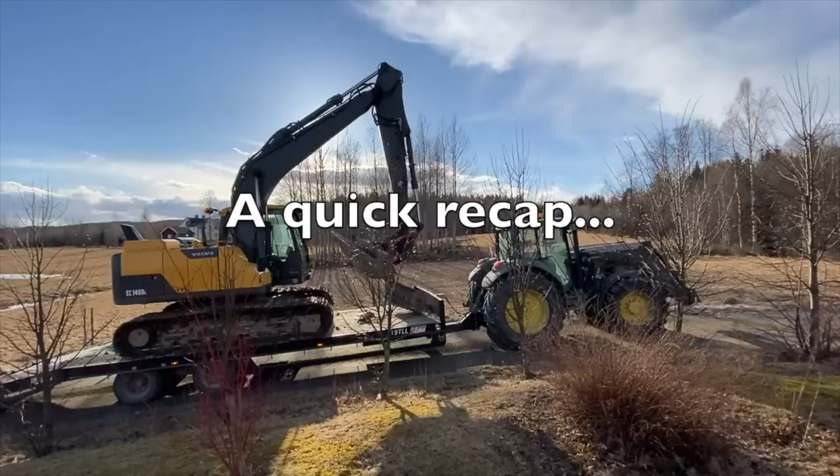All right, well, this front lawn is about to change. The dig went extremely well.

Well, it's come to that time. We're getting digging, we're starting tomorrow. It's super exciting. All right, well, this front lawn is about to change. We're starting digging tomorrow - swimming ponds, Attefallshus. It's going to be very different.

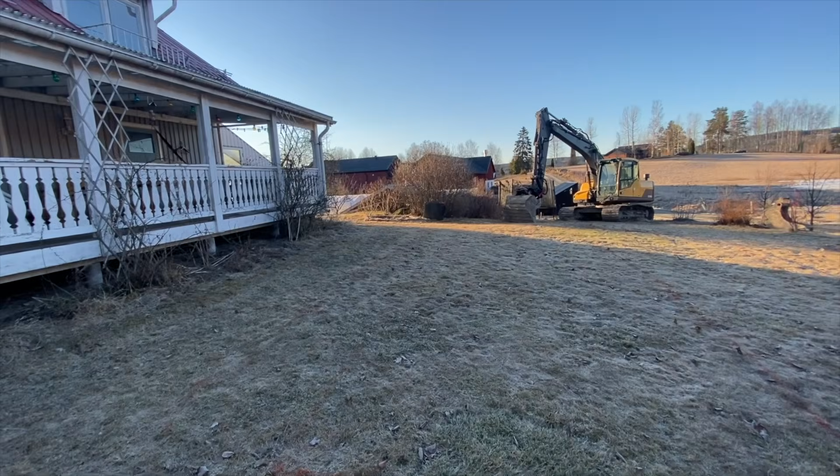So regular viewers of the channel will know I've been planning a natural swimming pool build for a couple of years now, and now's the time to get on with it. So the build, in a nutshell, is going to be dig a very deep hole, 3 by 10, with a pond of equal size around it. We're going to have to berm up this side to get the ground a bit level - take a bit from here, add a bit here.

First thing, take the topsoil off, put it aside for repairing the job. Dig - hopefully we haven't got any massive rocks we can't deal with. Probably up to about 5 tons we can move, but it seems the house is built on sand with lots of smaller stones. Certainly from when we dug the lean-to greenhouse, that's what we found.

And then we've got to have some flat pad where the excavator is standing. We're going to build an outhouse there for extra accommodation for guests coming to visit - come and visit me in Sweden, you lovely people. And we've got to dig a pipe to the lean-to greenhouse that's going to house sewage, water and electricity. And we've got to have another pipe that goes all the way to the septic chamber for this new house. But we're not going to build a house just yet.

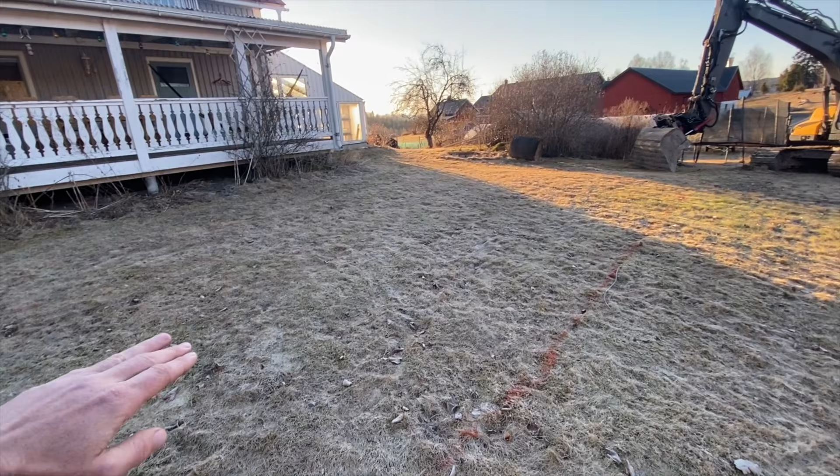We're just going to dig and make a total mess of the lawn. And then I'll probably start building up the concrete block wall in here so the sides don't subside. It's quite sandy, so we might have to dig at an angle so it doesn't collapse in on itself. And then we've got pond liner, then we've got to put in some subsoil on the edges of the pond for plants to grow in.

Cover that all up with gravel. Install some pumpy things that make the airflow nice to keep it oxygenated. Plant lots of nice stuff around and do some landscaping, and come May we'll be building a little house here. It's going to be pretty awesome. So let's get straight to it.

All right, digger's here, I'm not even ready. Got my trusty laser level, got my spray paint, got my measuring tape. Let's go.

Okay, so we begin - that's kind of what we're doing. We want to end up with some nice decking around here to the Attefallshus, that's like a little mini house, and a deep swimming pool, 3 by 10, maybe 2.5 deep if we can get down that deep, with a pond of equal size around.

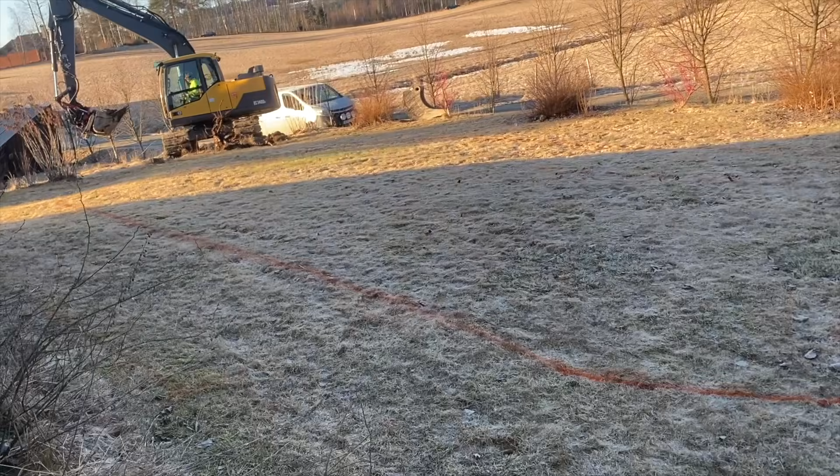We're gonna have to berm up this side. First though, just taking the topsoil away, putting that to the side. We'll see how it goes.

Time to get the coffee on. Just a normal day on the farm.

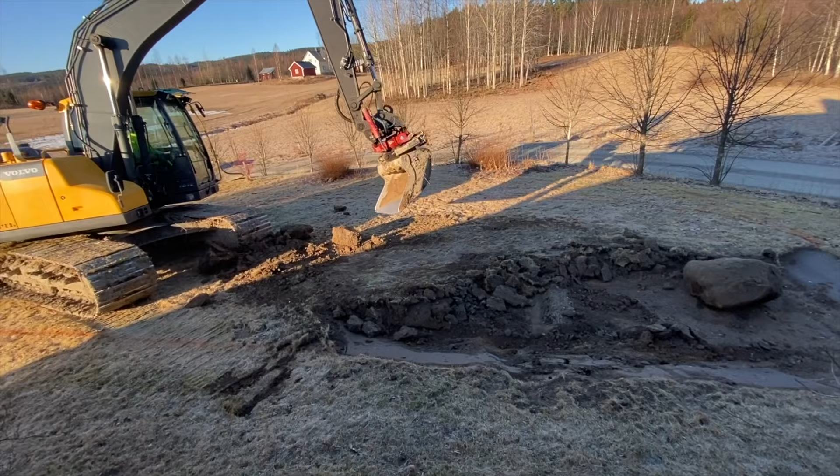Only got one way in with the digger, so we've got to backtrack. Basically we have to dig from this end and leave it complete as we go, because the digger can't come back in. Fuel price has gone up - Eric was telling me it's 600 euros to fill the digger now. That's a couple of days work on the digger typically, but fuel price has gone up a lot, as you all know.

So we'll see - this is the same digger driver that we had digging our big pond. He's very skilled, and with that angle bucket can really sculpt the ground here. It's a bit frozen on the top, so we're just digging out frozen topsoil and stockpiling it for now.

So this side is going to be underneath the decking, so the decking's going to come out straight into the deep bit of the pond. So it's going to be quite a sharp angle on this side - that'll be hidden away under the deck a bit. Get some plants in there, like lilies etc, and then we'll have more plants on the far side.

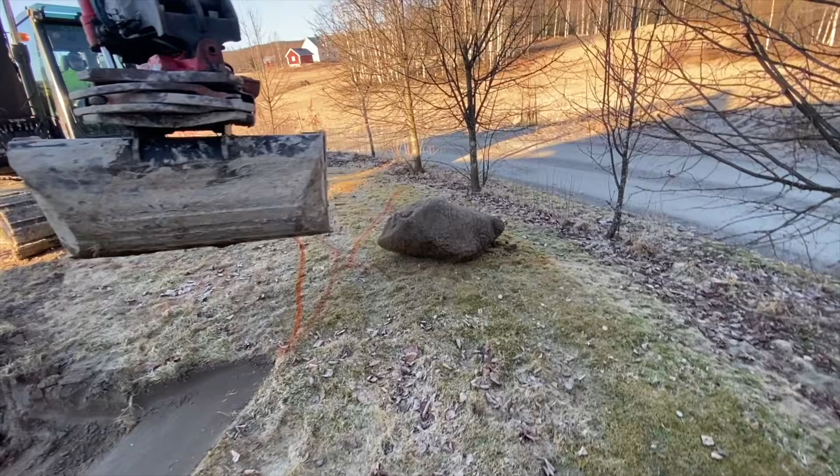All right, that's the sitting rock - sit and look at the water. Always hard to see with your eyes, but we have a pretty level surface along this edge, which is perfect. But that means basically the rest of the surface is going to be built up.

So it's starting to build up now. It's going to build up probably quite high on this side. We're going to measure that.

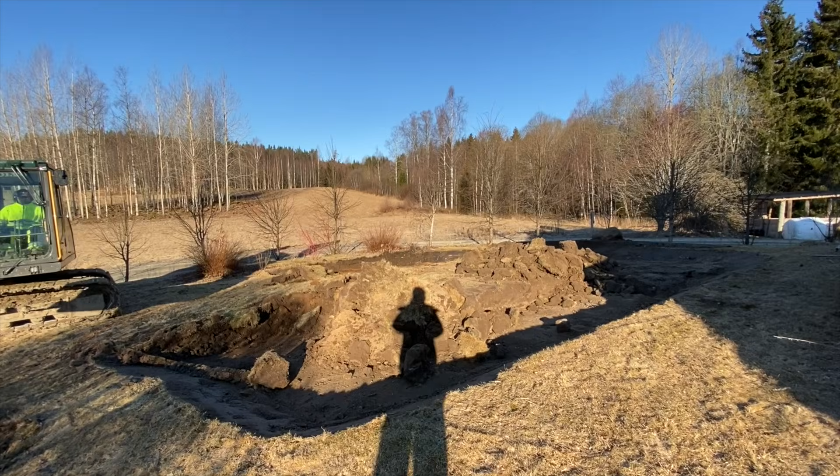It's always fun to watch the digger driver, and I spend the entire day just observing, thinking through how he's thinking through the job. I learn a lot from that process. I've always sat and watched all day when big machines are working, because there's a lot of thought and skill goes into a job like this, and thinking through workflows, which is something I love to do too, so it's really fun for me.

We started building up the far end now, but it's going to really raise up the garden on the far side. Those bushes there, I want to keep the trees, but those bushes might have to go to level it in and try and make it look a little bit natural by the end of it.

Getting to the sand now. It's frozen in the topsoil that we're lifting aside. I'm curious if we're going to be able to go straight down here, because you never know what you might find. But good progress, I've only been at it half an hour.

My plan is to possibly just take out these two panels, but maybe take out all these panels and build an integrated deck that steps down to a flat deck at the edge of the pond. I've got these roses in all the corners and two on the front here, so I'm just pruning them now, and I might have them popping out of holes in the deck steps. Could be quite beautiful, I like flowers.

Who doesn't like flowers? So Eric's just moving soil downhill. We'll probably come with a tractor and trailer later, but some of this topsoil is going back onto repair. We'll have a lot of subsoil to be removed that will get dumped up at the top of the farm. So far so good.

So I've been at it an hour now, but this subsoil looks pretty nice to work with. Let's hope it goes down like that for another 2.5 meters.

We hit an old drainage pipe that comes from this guttering here to drain away from the roof, but what I might do is intercept this and have it filling the pond anyway, so no big deal. What I don't want is water draining into this on the outside of the pond liner, so that it balloons the liner up through the wall, if you see what I mean.

It's very sandy, it looks very well drained, that's why the house is built up here. So I think what I'll do is put the rainwater straight into the pond and have an overflow to the ditch at the other end.

So we're digging this bigger hole so that I can put insulation on the outside of the brick wall. So we're digging bigger than we need, so we end up with a 10 by 3.

Love this tilt bucket that all the excavators have here in Sweden. It really turns this big machine into a sculpting machine. Saves a lot of time and a lot of maneuvering, therefore a lot of diesel. And this machine is moving a cubic meter every 30-40 seconds.

More rocks. It's going to be a nice sit spot, but it's going down real nice here. That's the second bigger rock we found.

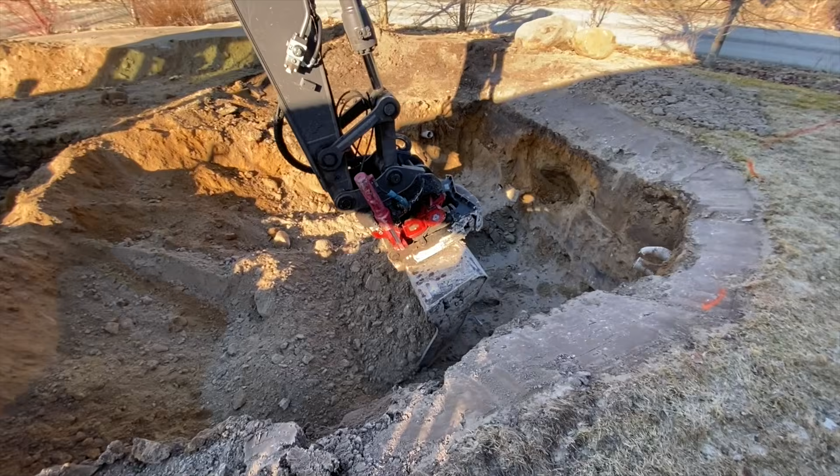I love this kind of process. It's just super creatively fulfilling to design projects like this and then carry them out. It's always an exciting day when the digger comes and it really starts actually happening.

Grace has got a play date today, so we've got a good long day of digging. I expect we'll get quite far with this.

So that's approaching 1.8 meters now, 2 meters. We want to see if we can go down to 2.5. All right, just marking levels.

You can see it's quite a lot higher up on this side. This is the lowest corner. Okay, on the fly meeting.

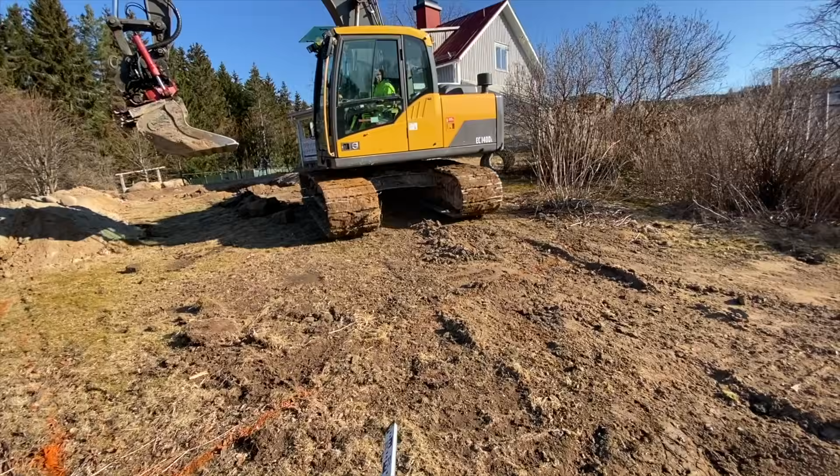So here is the pad for the Attefallshus, but it's going to be down below that wall where you can see my spray marks. So we decided we're going to take all the topsoil this way, stick it down in this growing pile and build this whole land up to put the Attefallshus on, which is going to just be way nicer. It's going to be looking over the pond at the same level as the house, and it'll be quite a big disturbance.

We're going to dig up these bushes and batter this wall with all the soil that we're digging out and just make this quite a steep slope down to the trees. It's going to look quite different in here. That's the way it is. That's what we wanted.

I always hated these bushes, so I'm not even going to bother keeping them. Just get rid of them. A lump of frozen bushes.

Let's measure this, see how deep it is, and then get the drone up in the air. I think it's a good call to lift up where the Attefallshus is too. That's where the digger is now.

It's going to look a bit weird from the outside because it'll be like a steep bank, but from the inside it's going to be a glorious spot to have that house at the same level. That also gives us more purchase on the sewage that needs a bit more height to get a good drop to the sewage.

But it's going to make this enclosed space with these lime trees forming like a visual barrier when their leaves are out. And it's going to be a little sun pocket in the evening. It's going to be beautiful.

Visions coming to life. Nothing holding you back. Just got to go for it with these things. Life is too short not to do awesome stuff.

Okay, topsoil's gone from the Attefallshus pad, so we can build that back up. And now we can use the subsoil. Still got to go down 20-30 centimeters in the deepest bit, so we'll have plenty of soil to build all that up with.

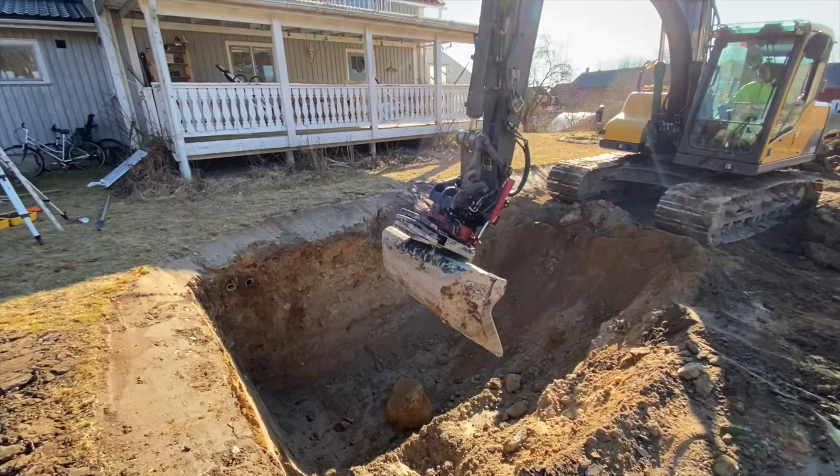Another rock for the collection.

Alright, a couple of hours in and we've reached depth. It's 2.5 meters or 2.4 meters. That should be plenty, that's enough to dive. And it seems like we're going to get through all this material. Lovely job.

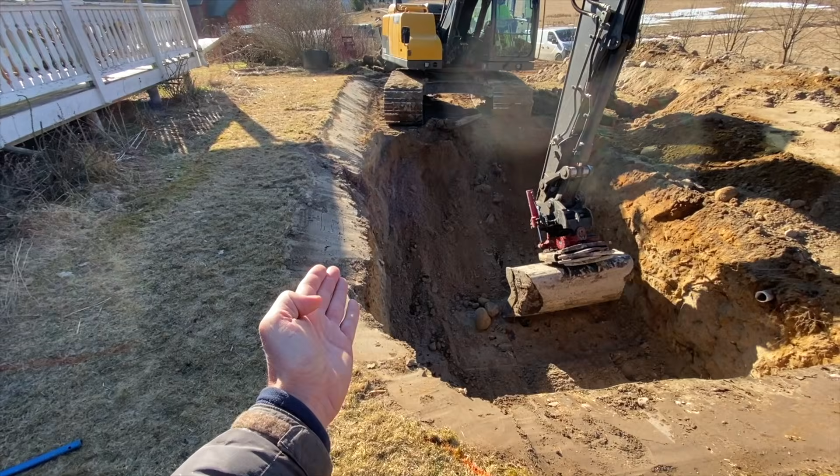So, just thinking ahead, we're going to take a little strip off here. It's going to be, imagine I build a brick wall up here, then I'll put the insulation and backfill, but this is going to be a bit too steep. So I want to just shave that off, make the pond wider.

And then on this side, he's going to track roll the walls to compress them. But I want a bit of a shelf going up, so by the time I fill with gravel, there's still enough planting area for all the pond plants that are going to go in.

But we're getting down now. It's definitely deep enough to dive in. Bit of compression going on the subsoil here. Now, because the pond is lined, it doesn't need to be exceptionally well track rolled, but it will subside obviously over time.

Alright, shallow in the edge a bit. I think that makes sense. It's going to be a lot for me to backfill by hand otherwise. That's definitely better. Changing plans on the fly.

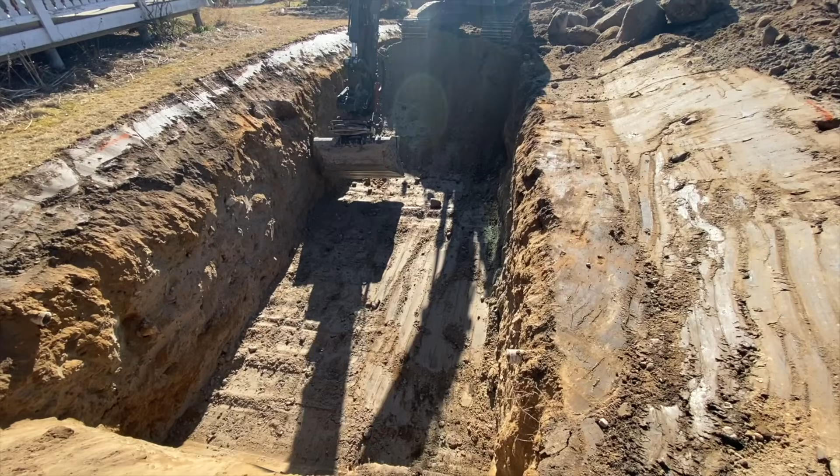Okay, just had some breakfast. Now I'm just getting down in here to take some measurements across this pad. It seems like we're raising up slightly. So, quick coffee break and just check that before we carry on digging.

Just moving plants. So these rocks are going in to form the back wall of the little house that we're making.

Okay, I've been shaving a straight edge as best I can down there, and we're just going to finish digging a vertical wall this end. Then we got to deal with pipes going to the house and the sewage, and then making this pad. Just making quick work of it. Good soil for it.

You can see it's going to be really nice to open up the sides here and have the decking down. We're going to get all this sunlight reflected off the water.

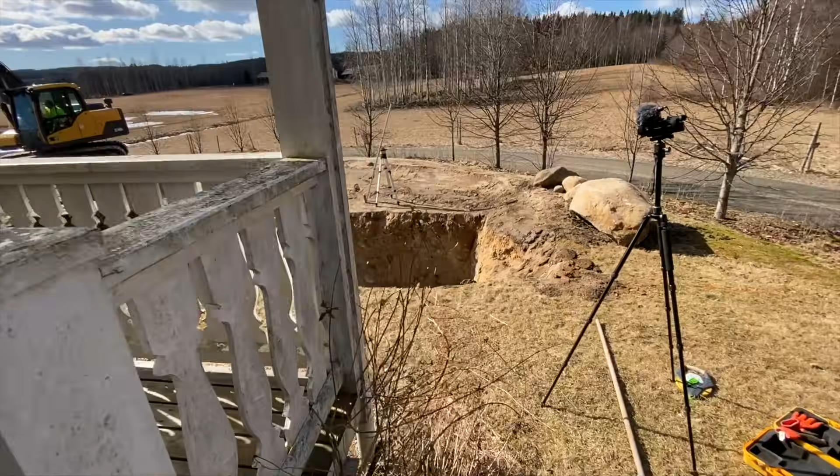So a couple of thoughts at this point. We're making the pad for the Attefallshus, but what I notice, I'm obviously interested in a nice straight edge that I can build a wall quite tight up to. This wall is tapering in on this side, so we need to do a bit of work on that.

Here I've just been measuring the water line at the top of the batter, and that's perfect. You can see on the far side, it's going to be 2.5 meters deep. I think it was a good idea bringing this pad up, and it doesn't look too unsightly.

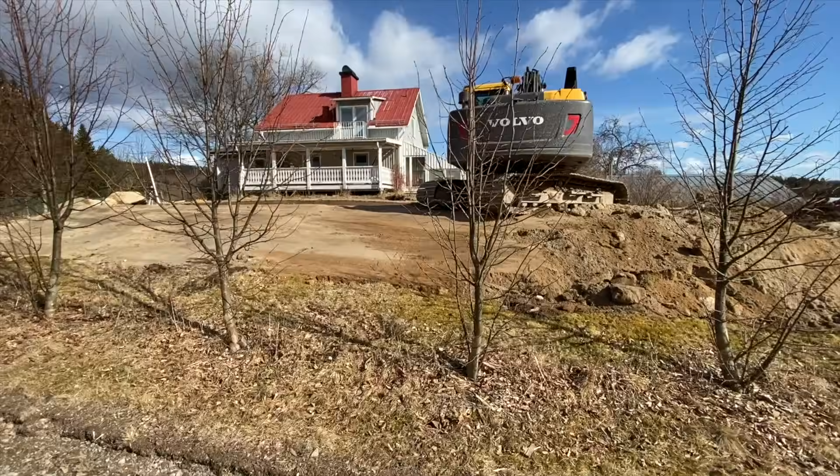If we go down onto the street, it kind of creates a bit more privacy to the garden. It's quite nice to have this up away from the road feeling, with a nice fronting of bushes. All of these rubus here will grow up as a hedge with the trees joining together. I think it's going to be quite beautiful, and we'll probably put in perennial plantings along the banks here.

Getting there. That's probably a day's work and we'll be mostly done, so pretty cool.

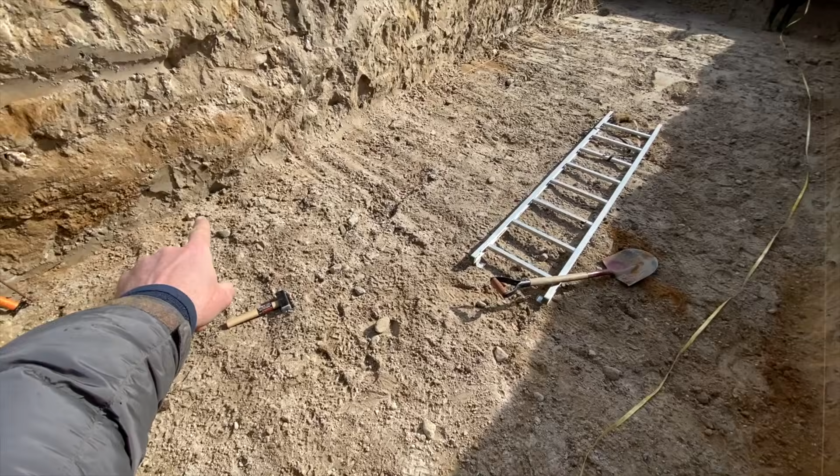Okay, so we've laid a string out beyond the neighbours here. We've squared it off, so we've got just over 10, just over 3, which means by the time we put the wall up, we'll put the bricks up to the string line, and then we should have enough of a cavity to get some insulation behind there. And then you can see there'll be in places a lot of backfilling to do, and that will allow us to smooth out this edge to accept more gravel for plants.

So I'd say that gives me the measurement to now order the concrete blocks to build the wall. I'm probably going to build the wall up to this height and then smooth all this in by hand.

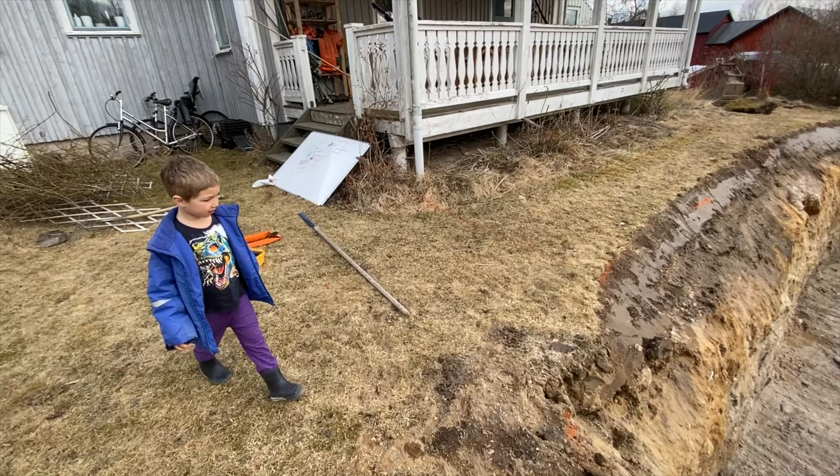Nice. Oh, done for the day. What do you think, Ragnar?

Pretty crazy, no? Yeah, deep pool. That's a deep pool. So Eric was saying he's charging 800 crowns an hour now, so that's 80 euros an hour for his time, the machine and diesel. It used to be 600 an hour when we dug the other pond.

But that's basically 500 euros to get to this point. Tomorrow we're going to finish digging the connections to the greenhouse and to the sewage, and then we'll put topsoil back on the batter on the outside wall, and then we'll at some point start building the concrete wall. There's no rush other than getting the concrete wall in to stop any subsidence.

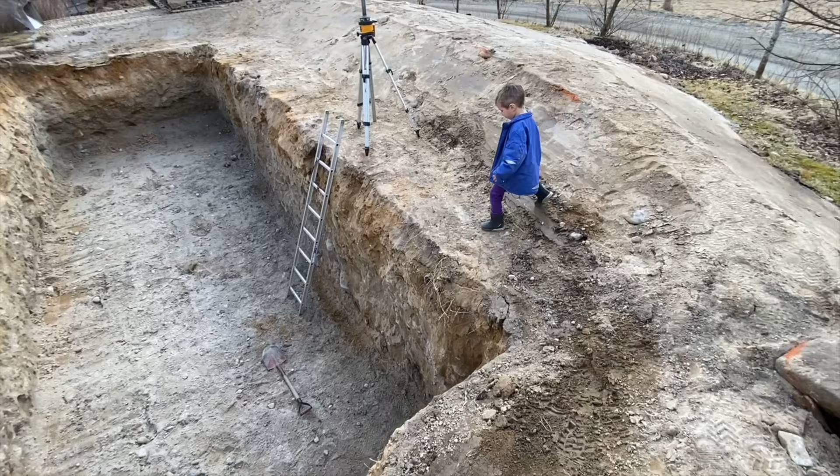Okay, so this is the pad that the outhouse is going to sit on, and that's where we got to today. Fantastic progress. Still got to put in the connections, but we'll deal with that tomorrow morning.

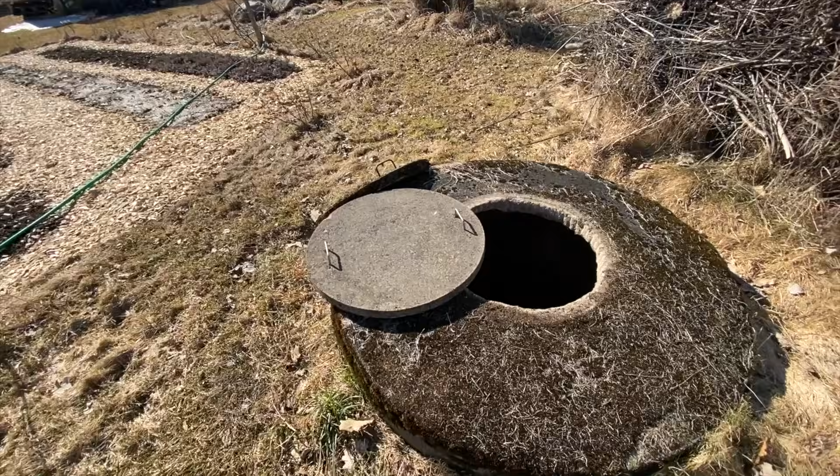Alright, so this is the septic tank. We're going to end up scooting this brash pile away, you can always put it back. And we're going to intercept with an existing pipe, taking an angle just to go around the bushes to the pad where the Attefallshus will stand.

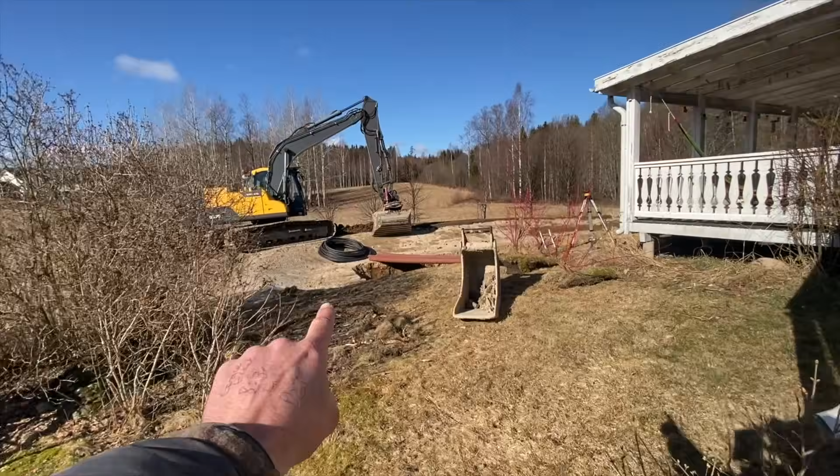Then we're going to dig in this black pipe, one for water, one for electricity, down through the side of the lean-to, because I can come out with the electric and water there, and it's not going to be so deep, so we're going to put the insulation on top of there. I'm wondering how the digger's going to get out of here.

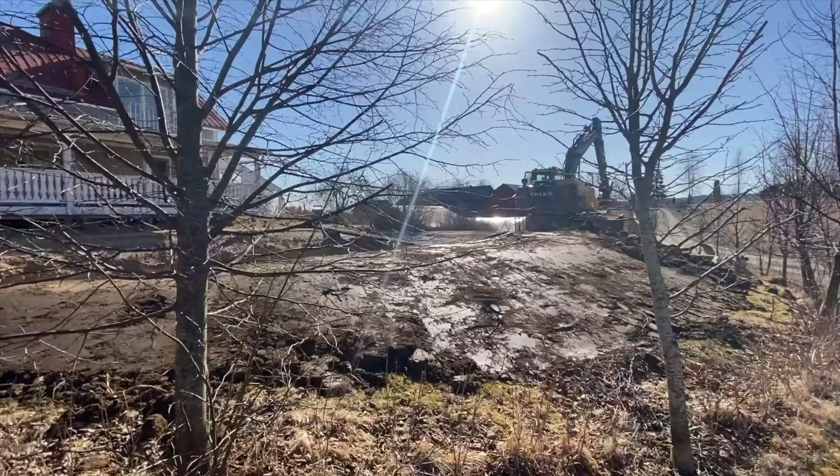Okay, getting down to sewage pipe. So this is what we have to intersect with and make it fall on a nice gradient all the way across to the Attefallshus pad. No problem, got the laser level, will be grand.

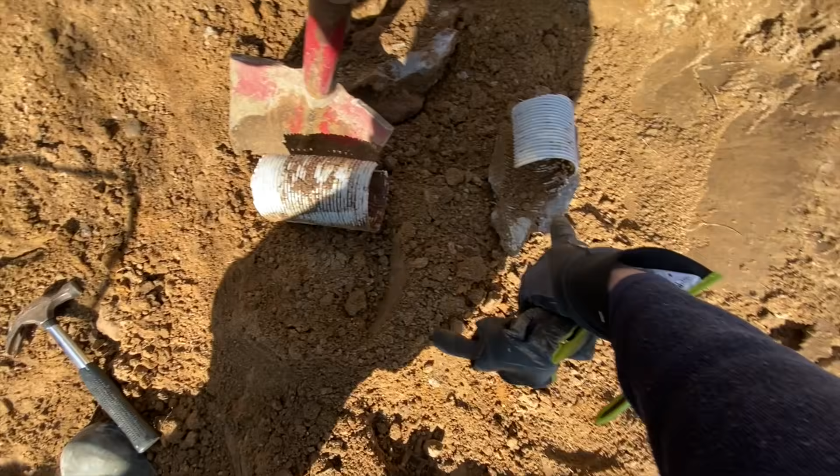Alright, so taking an old bit of pipe. They actually had a very dodgy connection made with perforated pipe and concrete. Seems to have held up though. So we're going to put a little bend in there and off we'll go that way.

Alright, so we're silking up these joints to make them go in easy, and I've just got a connection like that to send us off at the right angle.

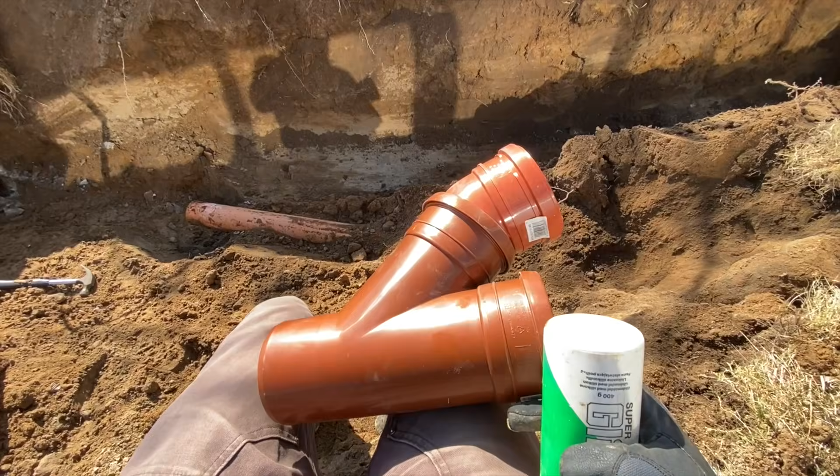Okay, so got this pipe in. Now we just keep digging and get the levels right. Getting there.

Okay, so we've just put 2 of these in to cover the sewage, because sewage pipe is empty most of the time, but it is quite shallow. Eric was just saying he's got water pipe just 20 centimeters under concrete with one of these and it's not freezing, so that sounds good to me.

So we're going to dig now to the bottom corner of the wall to the lean-to and connect back with where the pipe comes out here, and this is where we're going to put in this black pipe, which is one for electric, one for water, and we'll pop up in the far corner of the pad. That's where the water and sewage will come out from the little house.

Once we've got them in, it's time to just cover everything up again and finish up. Neighbour Bjorn is going to have some of the excess topsoil. We've got a little bit of topsoil to finish.

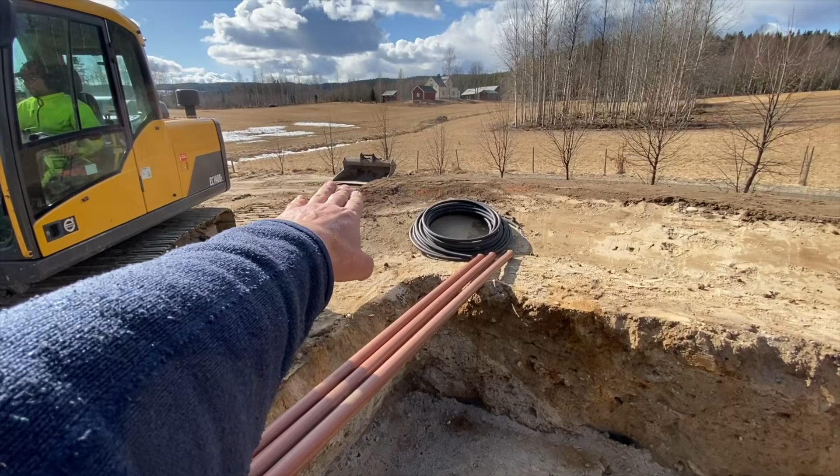You can see the water line there. Need to sort of bring it round here and raise this bit of ground up too, but it's a bit wonky because the pad is lower down than the water line, but the building will step up a bit, so it will work out in the end. It'll just look a bit wonky in the meantime.

Found the sewage pipe going around the house. That's a bit bizarre, but that's the way it is. Now I've got my new drill bit and I've got to chip my way through there, get a couple of holes through for the pipes, then we can backfill the whole lot and work on the other end of the pad. Okay, 2 holes.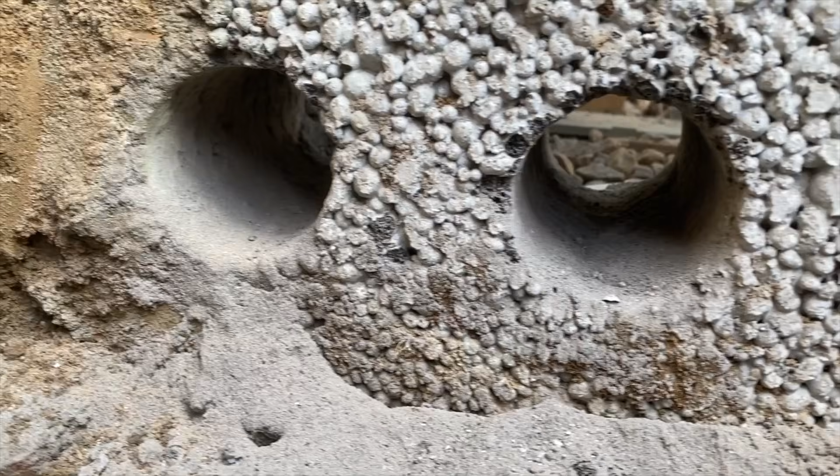Last sort of leg now, just getting the ditch to the corner of the pad for the house. Got to lay this curly pipe in and I'll jump on it while he puts a bit of soil on top to hold it down.

Chuck the insulation boards on top, fill it all up, smooth it over. Lovely. Okay, made it all the way.

Now for the wiggly pipes. Alright, 1 pipe in. It's a bit windy, just hold it down with some rocks. Get the other one in, then we can start putting a 10 centimeter layer of soil before we get these insulation blocks in.

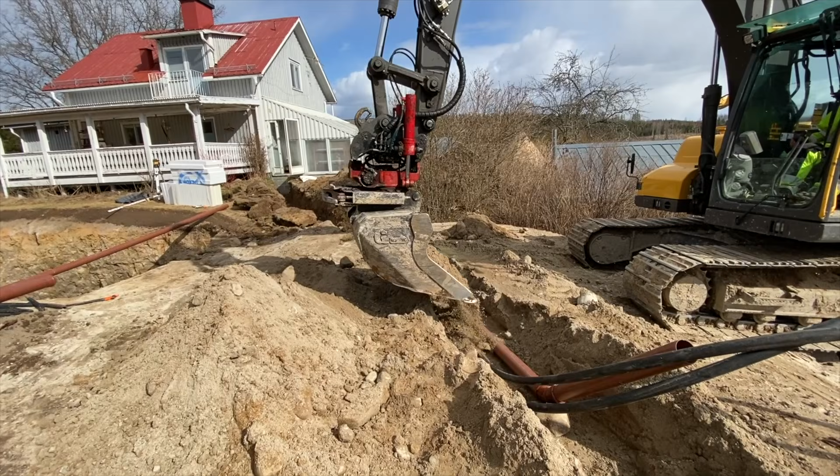Well, a few flakes of snow. Can snow till the 5th of June here, so it's not that surprising. It's a bit weird on a sunny day when you're getting sunburnt.

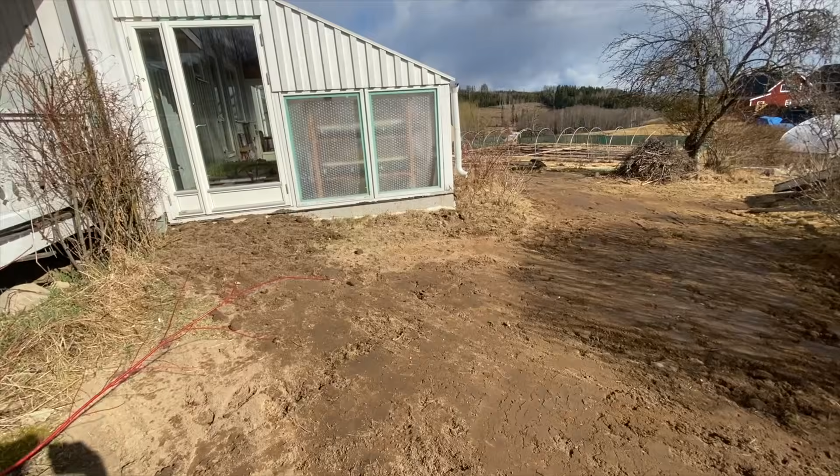Alright, digger's gone quiet, which means we're pretty much done. So that's smoothed out, and we've got the batter here of topsoil that will make up the water line coming around here. Perfect. We'll have to deal with this bit when we get to it.

Neighbour's going to have the rest of this topsoil, and we'll work out. I'm going to have to mark out where we put pipes and work out how we do the foundation for the Attefall house, because it won't work with the screw pins they were looking at.

So you'll have seen in the last few videos the dig went extremely well, but what you can see on the edges, maybe you'll make out, is that there is a little bit of subsidence. Now tomorrow, all of the bricks and mortar, I'm using a mortar mix to speed up the process working alone, are arriving. Hopefully they're coming with a lorry with a crane, and I'm gonna have them put them here, and then I've got to make some kind of wooden chute to send bricks down effectively. But this is okay as long as it doesn't subside anymore.

What we don't want to find is lots of water pooling in here and lots of subsidence on the edges. That'll get dug out easily enough, but over time that could get a lot worse, and that's just going to create a lot of work

doing by hand. What I'm going to do is get a straight line back up again. The string has been buried, and start putting up the base of the wall at least as quickly as I can now when the weather fares up a bit. We've been blessed by a week of beautiful weather, and then it's just like this, and that's the way it is at this latitude.

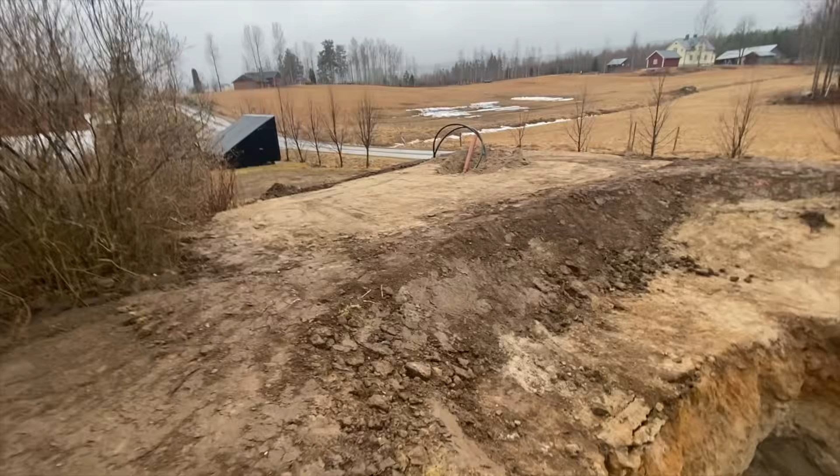I've got to get in touch with the company that's putting together the Attefall house for us, and they're using ground pins that drive into the ground, but high torque ones that you need a special machine to put in. However, I was intending that this pad would be lower down. It turned out this was a great idea to use some of the subsoil and get the outhouse at the same level as the water.

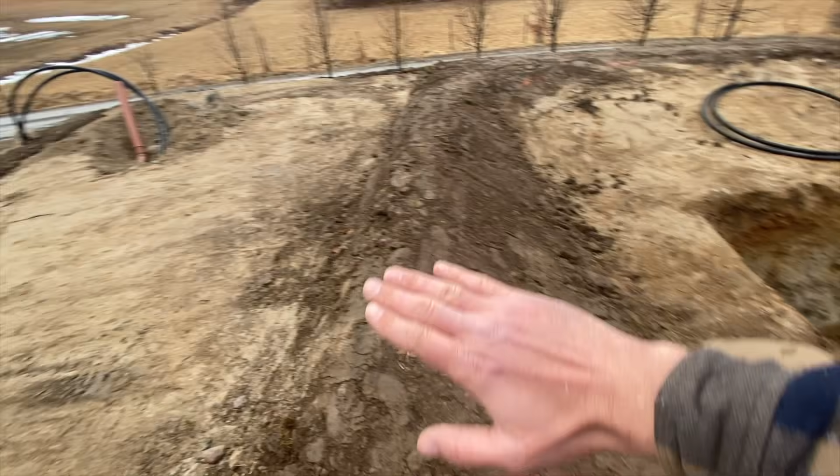Imagine this beautiful decking all the way joining the two houses. It's going to be absolutely beautiful. You see the water line there. It's going to be quite extensive and a lot of reflected light.

So what that means is they need to use either very long pins to get into the subsoil below what we've constructed, or we need to think of a different foundation like concrete or something, but I'm hoping we'll get away with the pins. Okay, brick delivery.

Hey. All right, bit of morning exercise. 4 tons of brick, sliding down a slidey slide, stacky stacky, ready to go. Okay. 4 tons of bricks coming down the slide. Functional fitness. Some people go to the gym. We do cool stuff. It's always better, real life.

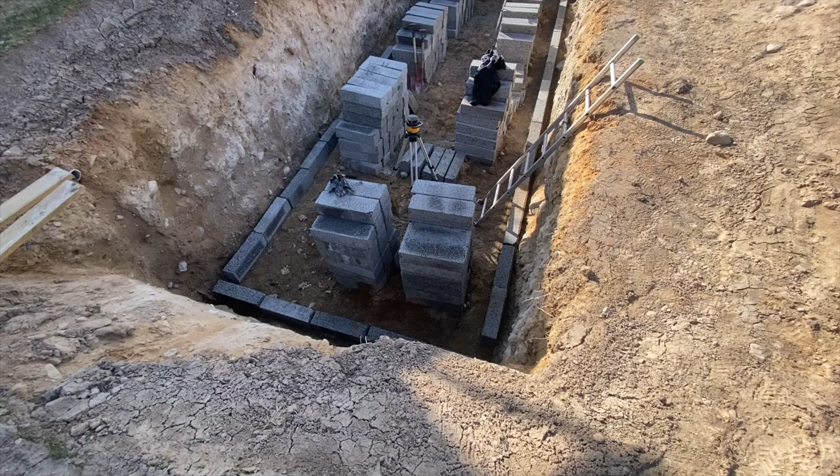First day. So we've been trying to get this lower wall level. It's level within a few centimeters, and that's probably good enough. It is just a swimming pool after all, and we're just trying to get a ring of blocks around. Every time the soil is freezing and thawing, it's dropping down, so having this wall is a good start, and then I can just build on it any time.

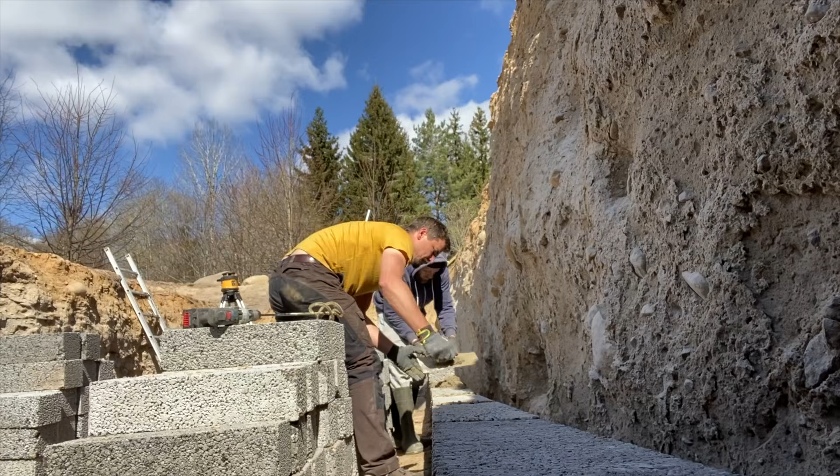Little frog. Hello, mate. You a bit eager? We haven't got any water yet. There's a few toads and frogs. Maybe they've fallen in.

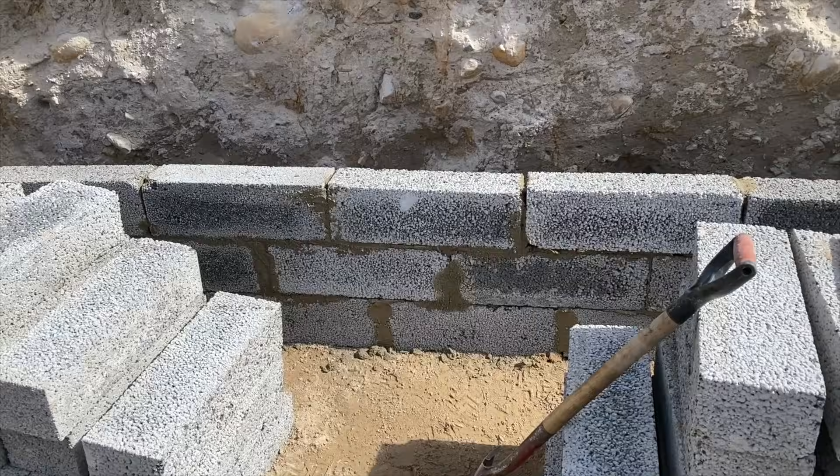3 layers up. That's where we're getting to today. And 4 more layers to go. I'll give you a sense of it. It's going to be up to here.

And then we'll put insulation boards behind the wall, and I've got 10 centimeter insulation boards to cover the whole floor here. Then I'm going to have to come along by hand and sort of grade this soil and pack it back down to make a nice transition from the top of the wall to the edge of the pond. It's going to be steep on this side and this side, and shallow on that side.

And then we put down underlay. Then we put down the liner and do a special fold to get it neat in the corners. Then we'll put wood along the tops of the walls here, just to define the edge of the swimming zone and hold in the gravel. Then we'll put another geotextile on the gravelled area.

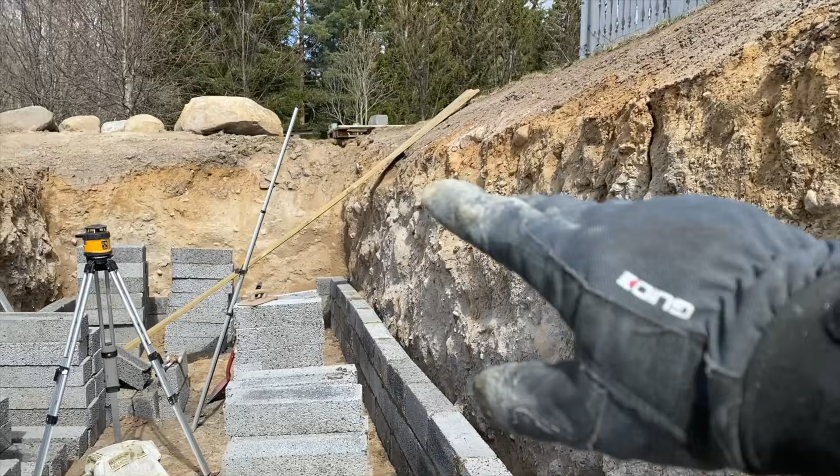Then we'll put the gravel, which we're going to have to move in by hand, which is going to really suck because we can't get the machine close enough. Then we'll plant it out. I'm going to go for washed gravel, but I can't get round sea shingle around here because we're nowhere near the sea, but washed gravel will minimise cloudiness and nutrients coming in. I'll probably plant potted plants into the gravel. That's my thinking now. I'll put in a bubble system, put in a nice bit of decking, put in a jump board from the roof. It's going to be all right. Last brick in the wall.

Alrighty, so that's the height of the wall. Now I've got to level the ground, take away rocks so we can put insulation here. Then it'll be time to put the insulation behind here and fill the void while smoothing out the transition here. I'm looking to put probably 40 centimeters of timber on top of the wall after the underlay and liner are in, and that will hold back the gravel.

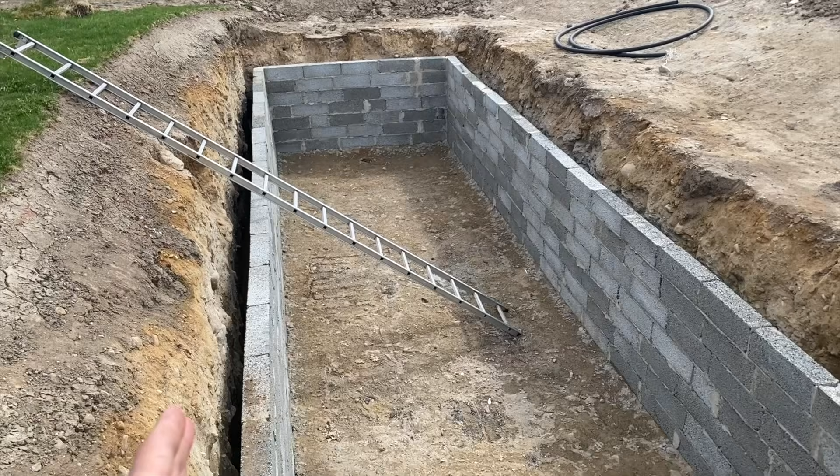So my neighbour Bjorn and I got to the point of finishing the wall, but we're stuck on this project because we're waiting for the insulation that I wanted to install behind the bricks and on the floor before we fill it with soil. They've been delayed and said end of the month, but now we're into May. It's a bit annoying because I want to get this project going, but I'm also considering forgetting the insulation because the cavity behind here is not that big, and what I want to end up with is soil level to the bricks.

And a nice dish shape to make the pond. There's going to be 40 centimeters of wood on top of this that holds back gravel that we plant in, so I need to end up with a nice profile, and I'm worried that by the time the insulation's in I won't be able to move enough soil to make that profile. We're going to have to see how that goes. I'm going to make that decision soon. Obviously some areas there's a lot more soil to fill in, but too many things to think about at this time when everything is starting to come to life.

Okay, pond build is going on. Got insulation on the far side down. I'm just filling in the soil. You can just see it's loosely stacked, and then there's a 100mm thick board on the base. Got some leveling to do, and that just gives me the profile. The wood beams are going to go on here.

They've actually been taking down a barn down the road. There's a lot of timbers that maybe we can utilize some of, but it's spruce, and I'd rather have larch, which is what Venice was built on. It's good underwater. I have larch, but no easy way to fell them in my forest without trashing a load of other trees, and don't have a sawmill. But we'll see, we'll get to that.

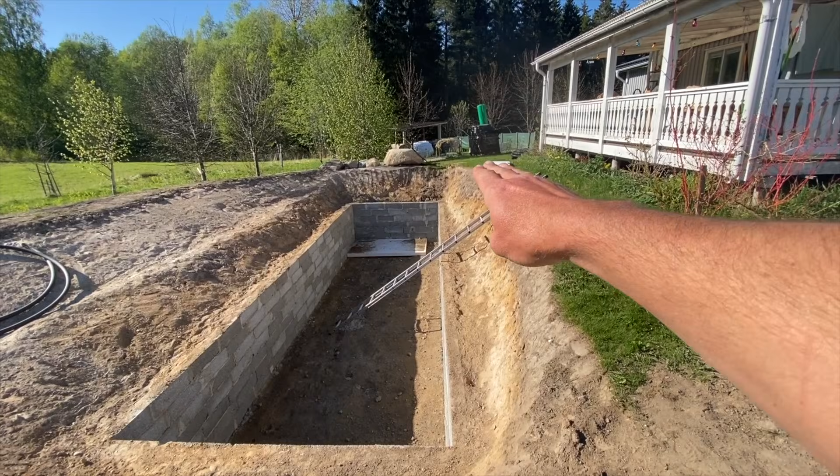So one thing, I'm still waiting for the building permission over here, but one thing immediately clear to me is that the backside is very steep and it's not going to work so well with the gravel. So what I'm going to do there is probably, because I'm going to have decking that overhangs the water like so, I'm probably just going to leave the liner there, and on these shallower curves put underlay on top of the liner and put back gravel and plants.

I'll still have plants here because, if you've been following the process, I'm going to put timber on top of the wall here that would hold the gravel back, probably about 40 centimeters, and that sort of defines the swimming lane. What I'll do then is just put some potted lilies along the back here, and they will grow up to the surface, and you'll have the wood, lilies on the surface with decking overhanging. I think you won't really see the liner behind that once the lilies are established, so it's going to be quite good.

Next step in here is getting in and leveling the floor, so that the insulation for the floor sits nicely, and then it's time to start putting underlay and liner. But it's really starting to give a sense of what the pool's going to be like now.

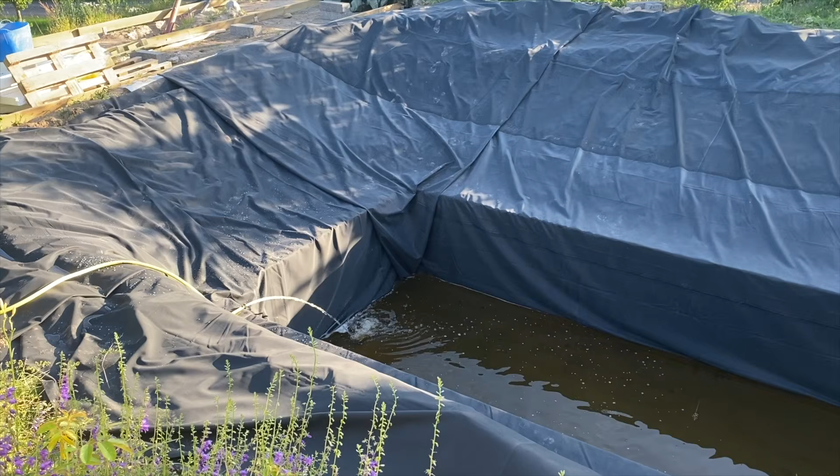Okay, looking good. So we just wanted to put a bit of water in today to get this weight in the pond, to start putting pressure on the liner. It's a little bit brown looking, that's mainly forest water. It's coming out of our irrigation dam, but it's actually got a layer of bubbles on the floor, so it's reflecting a lot of light.

This will go quite black. And then next steps is we're putting a wooden wall, maybe 45-50 centimeters high, around the top of the concrete wall underneath there. Around that will be perforated drainage pipe with uprights made of just drainage pipe.

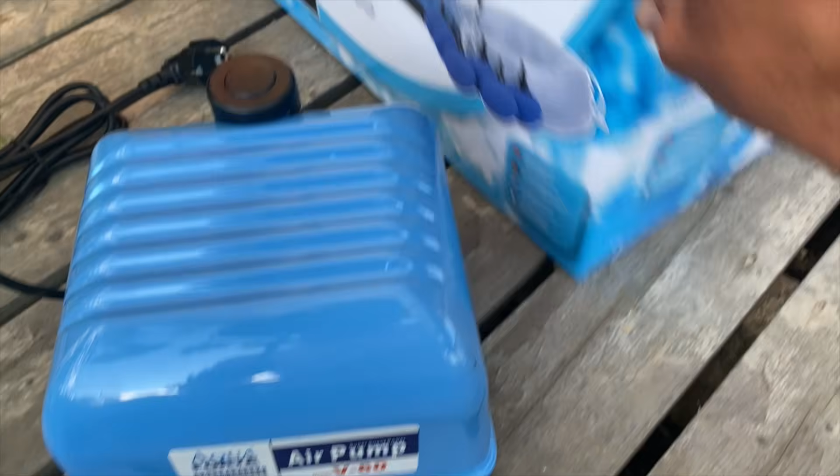And I've got 2 of these pumps, and these pumps are going to be connected with this clear hose to air stones down inside the vertical pipes, and the bubbles cause enough motion to draw water through the drainage pipes, so it will come down through the gravel, through the drainage pipes, causing constant surface motion.

Just think this through: this side is very steep, but the decking is coming out here over the water's edge, and I'm going to put lilies in pots floating on the surface with bubblers, and probably a row of bubblers on this side, just 3 or 4. Then the gravel will extend all around this side and be planted up, and that decking is going to go all the way along here.

I'm going to have to sacrifice these lovely flowers. I'm also taking out this wood here. This will all be decking with steps up, and I'm thinking of having like a little barbecue house here, and the decking will continue round the pond, and the Attefall house is going up here, looking everything this way.

So it's quite a big surface area, about 80 to 90 cubic meters, maybe even 100 cubic meters. It's 60 cubic meters up to the wall - well, no, that's a lie - up a little bit higher than the wall.

Looking forward to it, it's a really cool process. This is 1mm thick, high quality liner - most expensive bit of plastic I've ever bought. And we haven't secured it down yet.

Now that we've got this in place, I'm very confident that this will take up any rain and it's not going to cause any damage now, whatever happens. So this is a really big milestone for me in this project, and great to have the Regenerative Agriculture design course on, and lots of excited helping hands to move this project on.

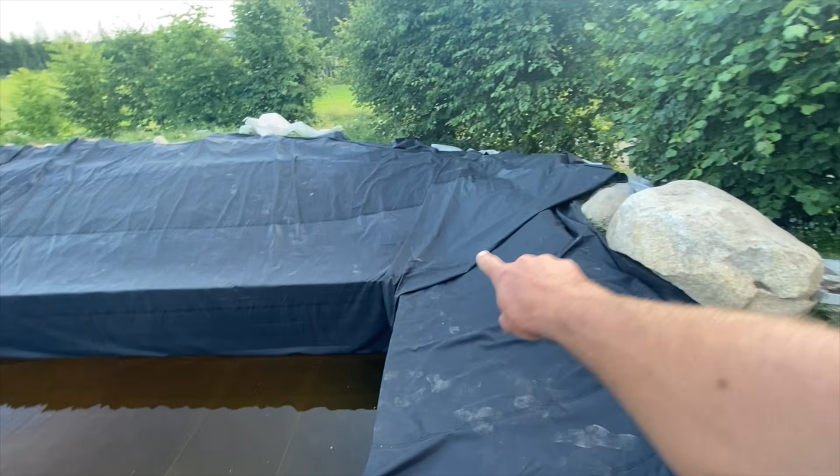Really nice job on the corners of this to make a neat finish. It's going to be beautiful. Finally, some progress, and this is one of the highlights of the year so far to me, to get this project rolling on. It's meant to be finished in early June. Things have been kicked back a lot with different projects around the farm this year, but I'm super happy to see and hear this pond filling up.

So this is the underliner that went underneath the butyl liner - or it's not butyl, it's the other one, the high quality pond liner. This is what's going back over the top where the gravel sits, and once that's in and the liner's fully settled, we'll be putting gravel in the trench we've dug around to hold all this down in place. Then we can start the bigger job of getting this all landscaped and planted. It's going to be awesome.

All right, rain and sun. It's going to be a lot of thunderstorm tonight. Anyway, next job, now the timber's here, is I'm going to measure corner to corners to corners, and then diagonally across, and then recreate that inner side of the wood on the driveway, cut and join all the pieces before bringing them over here, and hopefully they'll fit once that's done.

So this is larch. They built Venice on larch and pine and oak. It's going to be submerged fully underwater all the time, so it should last hundreds of years. Not sure the rest of the pond will. But it's very heavy, probably about 180 kilos per block.

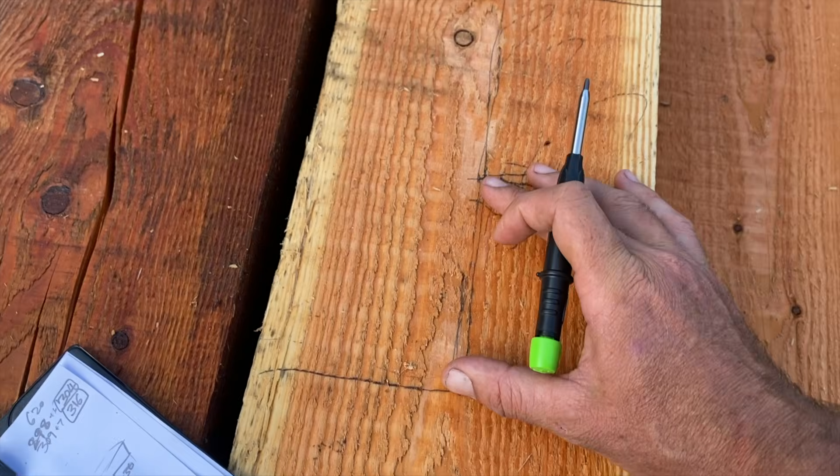So they're going to overlap like this, with 10 centimeter cuts in the corners like this. But they're not quite big enough. As long as it locks in there, it's going to look a bit weird if there's wood missing here, but as long as it's locked in with this joint, it's stable. I've just calculated a reduction using the most wonky bit of timber that's actually skewed if we look along it, so I want that to be an end piece because it will be less skewed in two pieces.

Turkeys are trying to mess up my marks there. Look. Hey, keep off the string line, will ya? They're precise measurements.

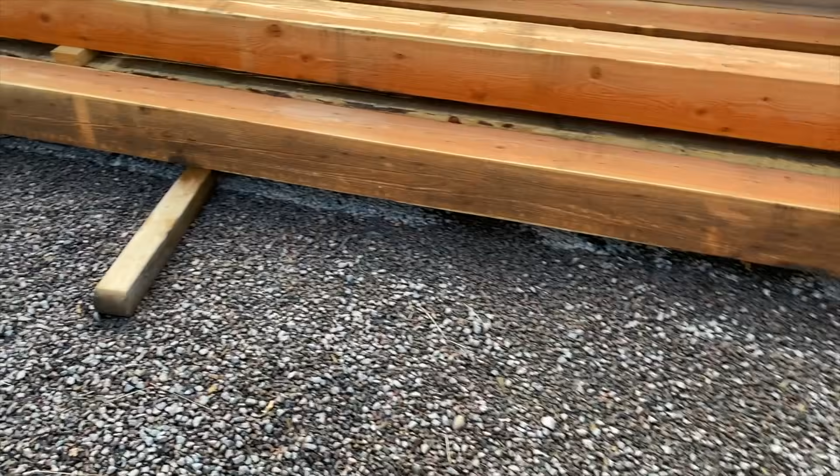So that's the plan - it's going to be a little crooked in the corner, but it'll be good enough. And I can't get any more timber like this, it's not possible. So that's what we're going to do.

So some modifications to the drawing. Because I only had 10 bits of lumber, I've had to chop the ends down shy. These are just dry fitted on an uneven surface, but they don't meet up in the corner here. That's okay though, it's locked in, and that's the main thing - it gives it some stability so the gravel doesn't push out.

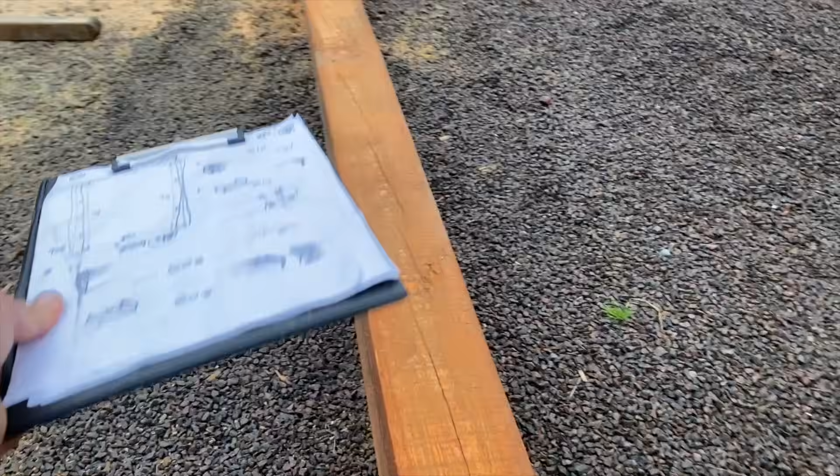Not the neatest joints, I'm just working with a chainsaw. I'm not even bothering to clean them up square because the wall is not square and the wall is not totally flat, so it's just going to be a division wall. It doesn't have to be perfect at all. You won't really see any imperfections when it's under the water - it's going to be about 50, 60 centimeters under the water. So you'll actually be able to sit on it, drinking gin and tonic.

We like that. I'm resurrecting these old timber moving pliers, and these are 160 kilos, but I'm able to shift these around just with one hand, look at that. Makes it kind of easeful. Now it's going to be heavy, I'm going to need both hands.

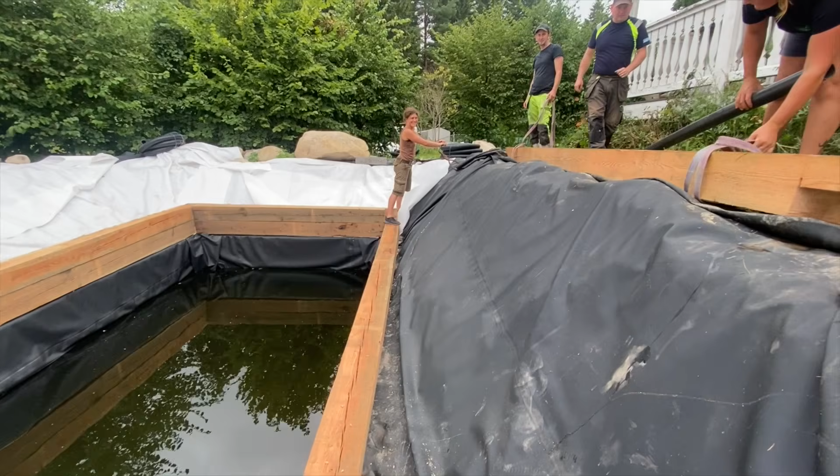Okay, putting the second liner on. Got to work out how to move this timber down. I've run out of fabric for protecting this lip. Okay, last plank coming down, so we're using a little tube to protect the liner.

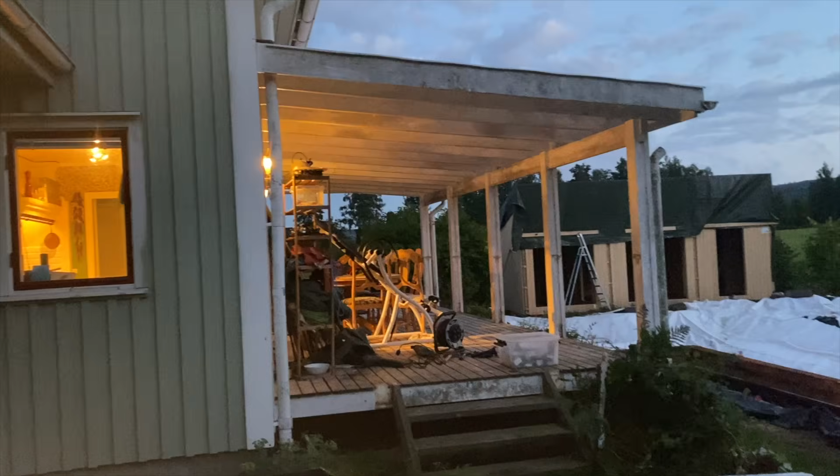Out with the old. Well, 9 o'clock at night - some decisions are best made late in the evening.

I'm thinking the decking's coming out over the waterline here and curving around, but possibly where the bush is there in between, having a little barbecue hut. It's going to look lush.

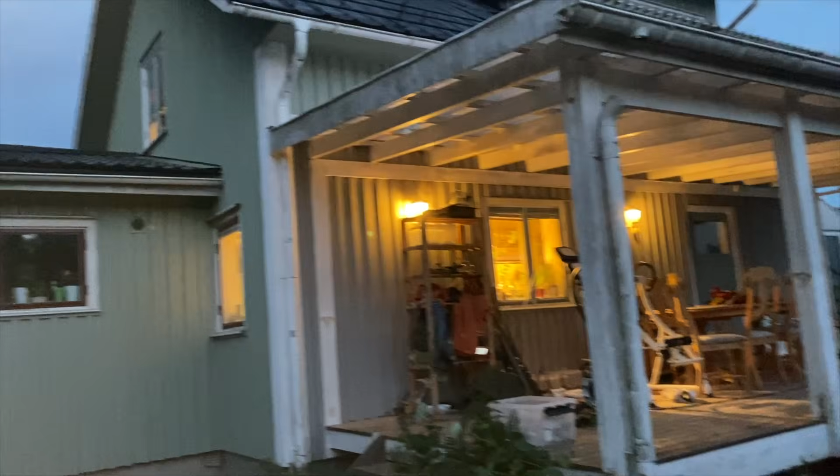Been doing some more painting. I've actually painted round all the way to the other side of the house now, and inside the garage port, which is the market garden wash and pack station too. It's very hard to see probably. So half the house done. Very nice.

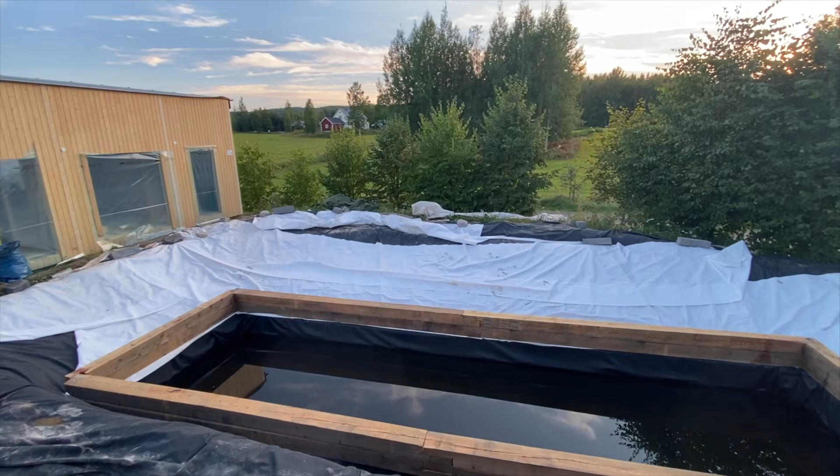Okay, so the next step has been conducted here on the swimming pond. I've put on little lips to be able to put rocks and gravel on top, with a bigger one in the middle, and also joined the weakest part of the structure, the join here. So when we start digging, I'll move some of the bigger rocks and wedge them into the corners to hold this frame down so it doesn't float. This is obviously a lot of raft material, and that's what we're going to do.

Tomorrow the digger's coming, but the digger can only actually sit in the gap here. So we've asked for washed gravel, and the lorry will back up and he'll be able to scoop it out. It's going to be like 20 tons probably that I have to move around a bit by hand because the digger doesn't have access. That's the way it is. Keep me fit and healthy.

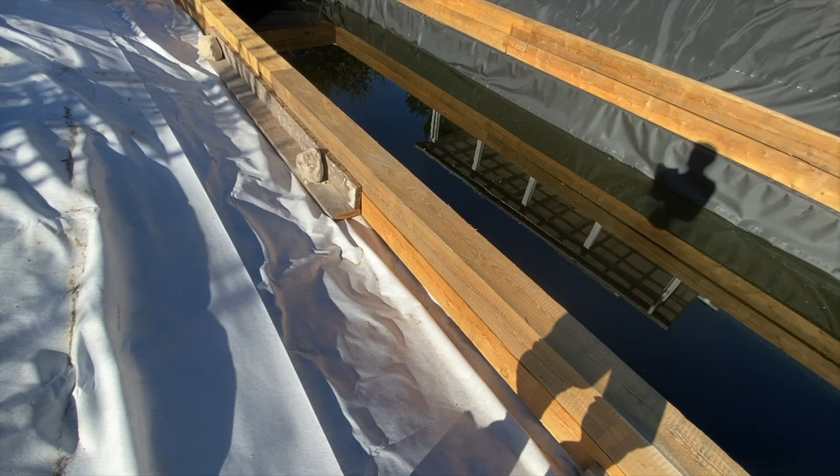But that's a bit of the structure. I think this, along with some rocks that can just sit on top of these bits of wood and act to sort of jam it down, is going to keep this from floating away. That's the plan. It'll be an absolute disaster if it does float away once gravel's in there, because it will obviously be impossible to get that out again. So I've got to get it right first time.

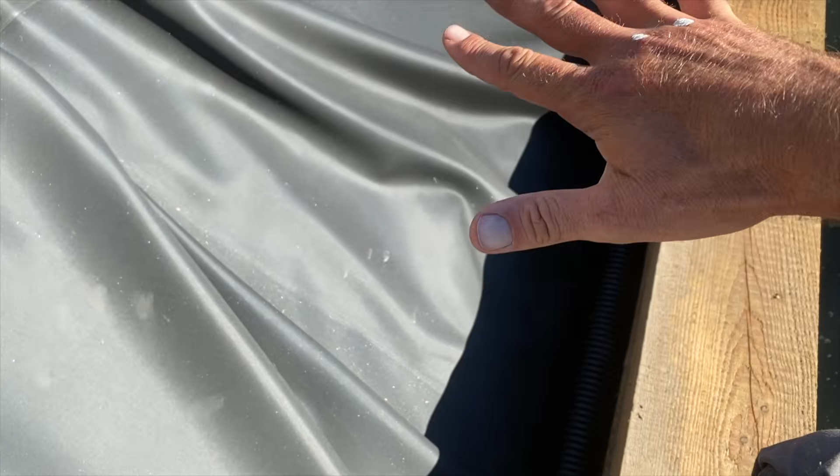Okay, last phase is I've got perforated drainage around the ring, and that comes to these joins, and I've got 4 evenly spaced vertical pipes. Down in the bottom of these, I'm going to drill a little hole where the air stone goes in, and that air stone is going to create a lot of bubbles. Water level is going to be up here somewhere, and so that will draw water through this perforation pipe below all that gravel and filter the water.

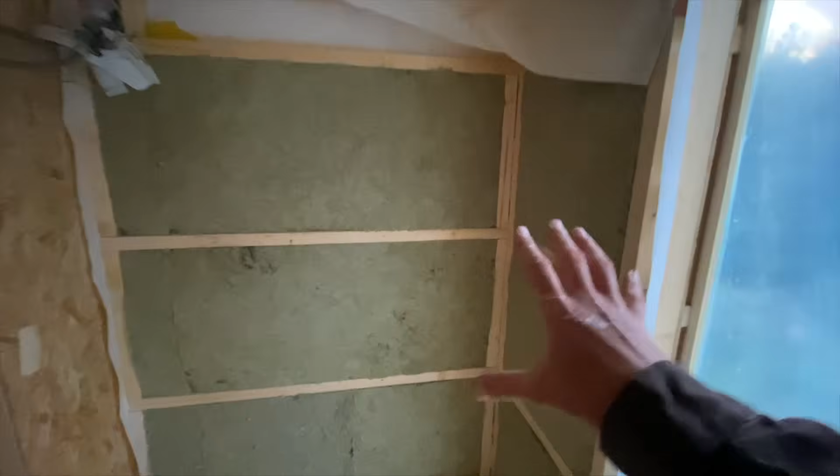It's been going on, it's getting insulated. This is going to be a shower room with a simple sink, mirrors, shower, toilet, and a little area to hang clothes. Then you've got a space that's going to be like a table, chairs, work area with a simple sink, not a proper kitchen because we have so many kitchens here. Sleeping loft up here, and then got plasterboard on in here. This is going to be a double bedroom looking out at the pool.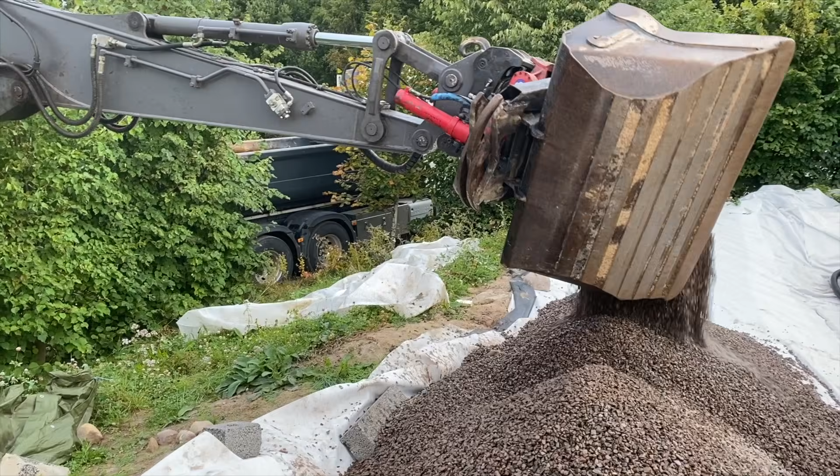So it begins. Eric's driving blind behind the trees to be able to bring this gravel over. It's going to be a lot of work moving this. Okay, moving some by hand. Going to be able to fill this side. We're going to have to move by hand to do the back there as well.

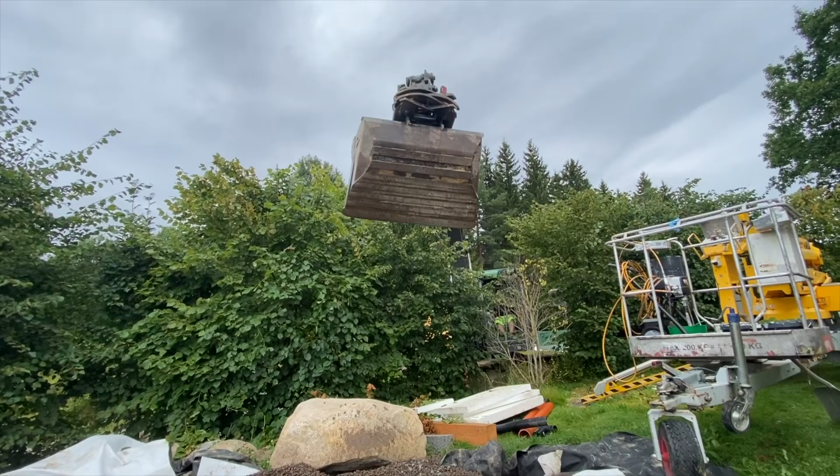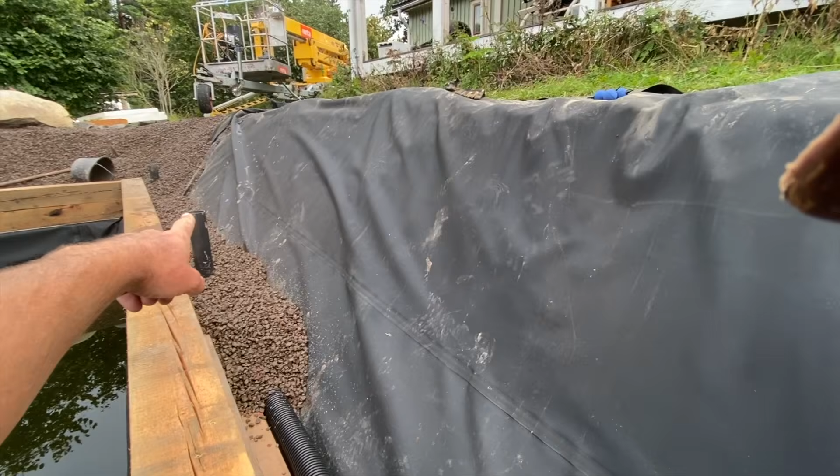So the bubble stone goes in the tube like so, and I'm going to feed these back to a central point to pump up here. I've got the option to put 2 pumps on if it's not enough, but they're not very deep underwater, only about a meter underwater, so it should be fine.

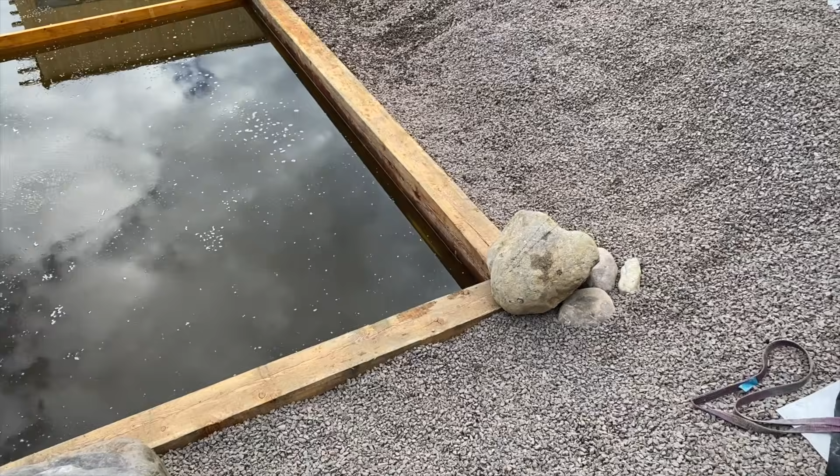So put in rocks. The wood, as I started filling up the pond, slightly moved, and that scared me. I do not want this wood floating off because there's no way to get that back if gravel is underneath. So, with inadequate machinery, I'm just hoiking out rocks, rolling them around. It's a bit of a job. The liner seems very hardcore, it's stood up to some pretty big abuse.

Just managed to get this beast up, coming up the bank here. Seems to work, haven't made holes in the liner yet. That's good, it's a pretty tough old thing. It's 1mm thick, so pretty resilient.

But better safe than sorry, I would say. So just a few rocks around. I think it's going to look nice as well as be holding down what's essentially a big raft. Well, when you're on your own and you've got half-ton rocks to move, so I've got a winch on, made some rails. I don't know if this is going to work, but I'm going to see if I can pull the rock along.

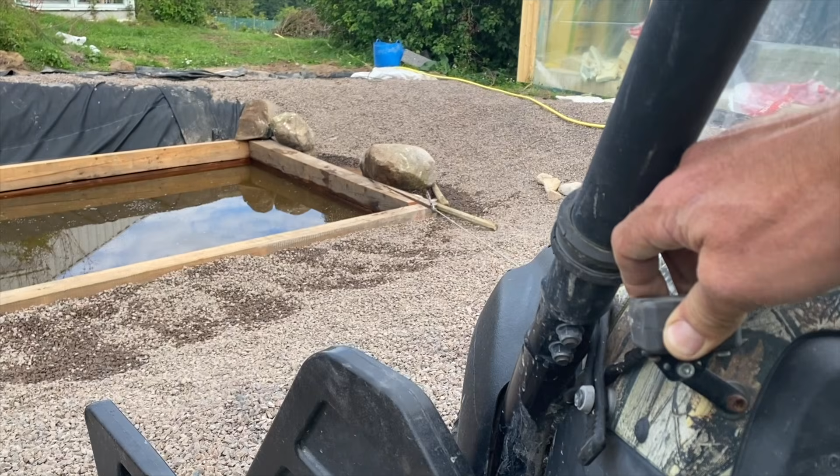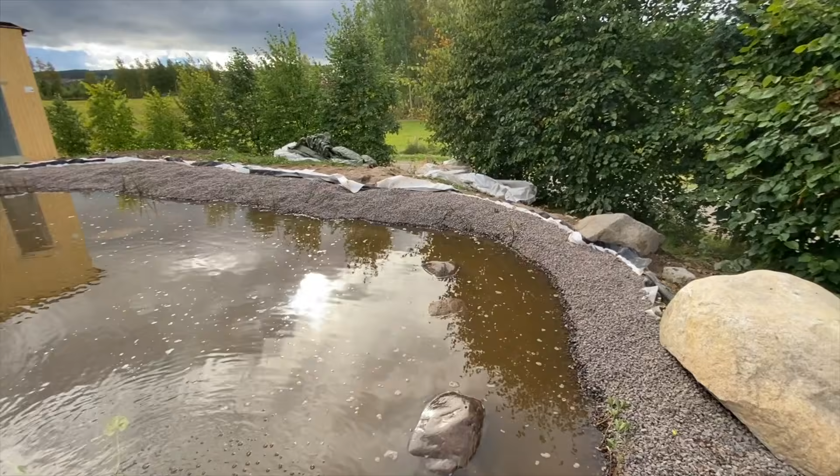So we put rocks around some of the wood to make the pond look a bit more natural, but also to weigh down the wooden structure. You can see the 4 bubblers are on, and I've got a few marginal plants in. The water's quite dirty because the gravel wasn't washed, but we've got it mostly filled. We're in the process of building the overspill, and this part of the liner is obviously too steep for gravel, so it's going to have decking out over the top of it. For now, just getting the water in, and once we've got the overflow done we can fill it right up - the water level will be near the top of the gravel here. Once that's done, we can tuck down the edges of the liner and start a bit of landscaping, put some soil back on and get some other plants planted. Pretty cool.

All right, planning the decking. It's going to be quite a big stretch overhanging the water, on the edge of the pool, which will allow you to jump into the deep water. There's going to be a diving platform out from the waterfall house, and the decking will stretch all the way around and all the way to the greenhouse. So a lot of work to do. I've just been planning it out, making measurements and cut lists ready for that project. Hopefully a few more sunny days to get this work started.

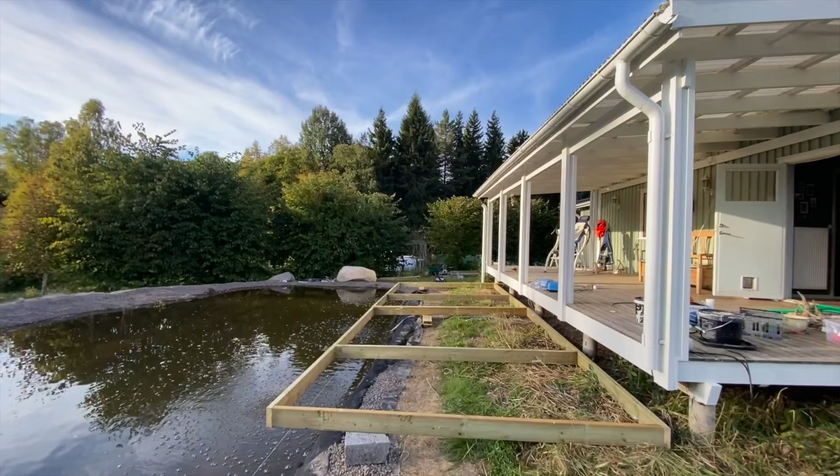Okay, decking going on, and a bit of decking over there. It's going to be 3 levels - first level, second level, reaching down another step to this one. Right now I'm just trying to do the awkward job. Got my waders on, and these beams are pinned onto the wooden beam, and we're just going to make a nice bridge for jumping in.

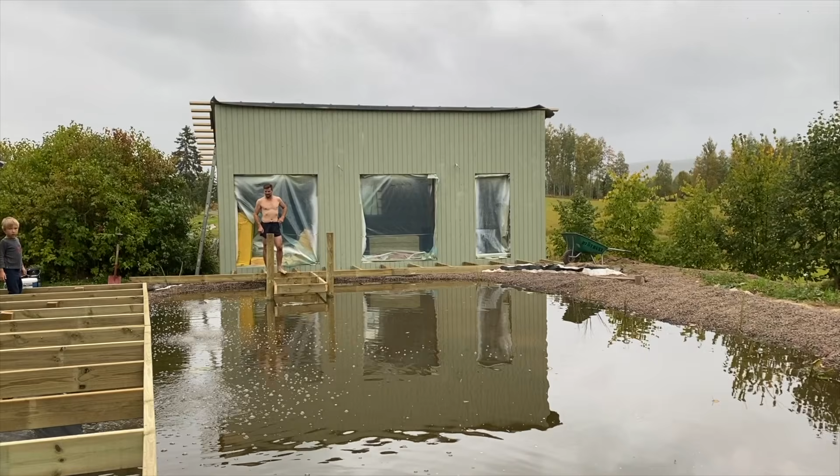Oh, first dive. What do we think? It looks good. Woo! It's fresh. I got my own little rock. We love it.

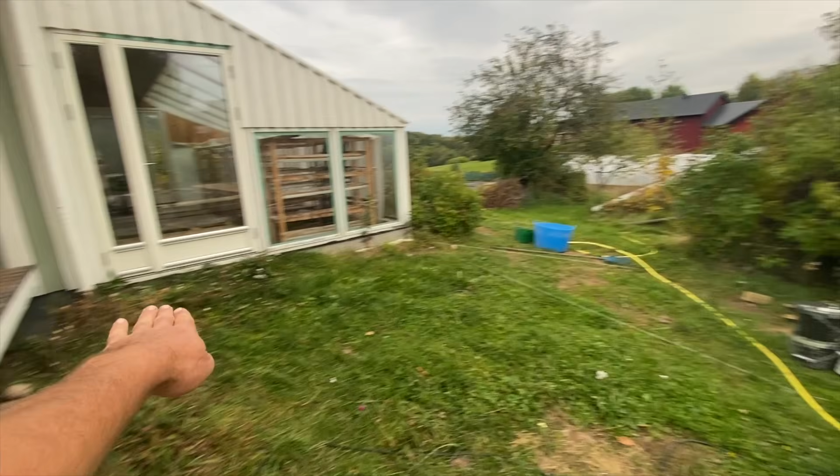Okay, little progress report. The decking is progressing, and it's quite beautifully formulated so that you have a step down here and the same height step down over there. I've just been laying a level beam to check that my calculations were correct, and they were. This layer of the decking is going to cut across and then all the way to the greenhouse, so it's all transferring to deck. I've managed to get it looking pretty good and pretty solid, and it overlaps the edge of the pool so you can jump in from here, but this is where you want to jump in to be able to dive and swim - very nice. It's worked out really beautifully. This is all micromanagement with laser levels etc. from the initial dig back in the spring when this was just lawn. It's all been calculated through, and it's beautiful to see it come together like this. In the next week or two I hope this will be fully done. Next spring it'll all grow into lushness.

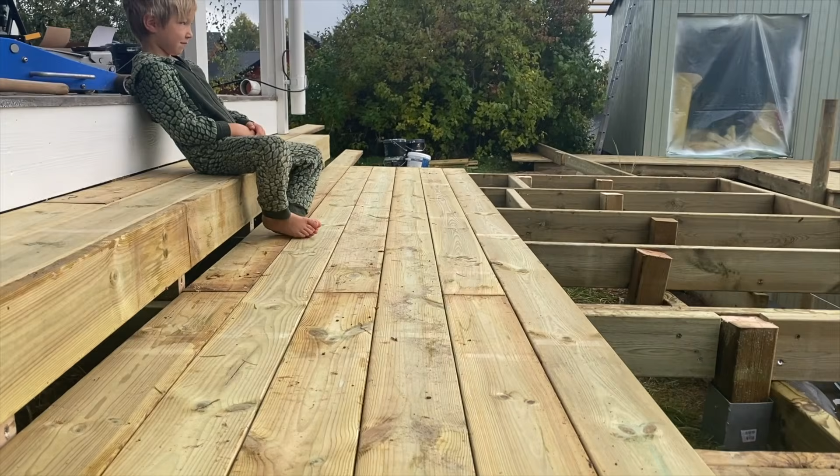All right, steps going in. Get this decking done today.

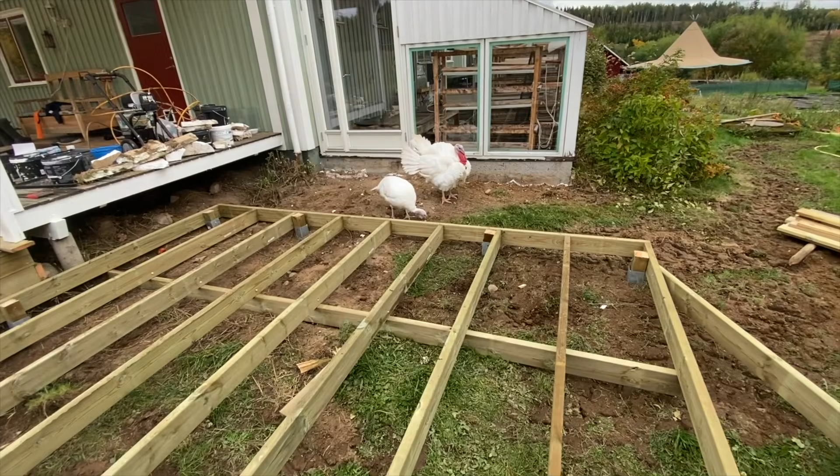Okay, working on the last section of deck. Just got these funny angles to get a couple more supports in. I've made this one at the standard board length - I've run out of decking boards now. This is all leftover from other platforms and things, but that means I've got a pretty easy process with no cutting to lay this square section, and then I've got a lot of offcuts I can use for this bit. Looking good. I've left a gap where the turkeys are, and I was going to go right up to the greenhouse, but I think I'm going to leave that for now, and maybe that'll be lawn. It's wide enough for the lawnmower, so that could be fine, and I might extend it over there afterwards. I'm going to feel into this, and obviously when everything grows up next summer, there's a nice rose bush here that I don't want to get rid of. I could have it coming out a hole in the deck, but it'll be easy to extend the deck here if I want to, because I can screw a ring beam to the actual concrete wall and easily extend it if necessary. But that's where we've got to. Need to go out and get some more boards, and then we'll be finishing it up.